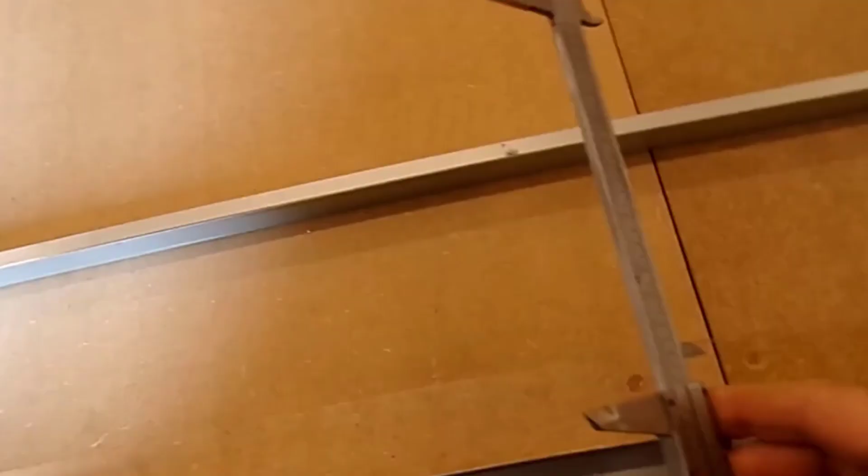The tapered bit of course doesn't need the jig, and it's 5 3/4 inches wide all the way along from one end to the other, as checked by a vernier gauge, and by precision straight edge it's straight. So there we go, that's ready for me to start assembling the spar.

On this side here, you might be able to just pick up, I'm not sure, looks a bit better with the shade there. There's tape going across there, and there's tape on this face here, and what I'll do is I'll lay the plywood in, bond the cap strip to one side. Once that's cured I can turn the whole thing over and then bond the cap strip to the other.

This tape is blade tape from my time working on Wessex. So we've got rotor tape and tail rotor tape being used. It's a little bit past its sell-by date for aircraft use, but it should be good as a sort of release to stop anything from bonding itself to the table.

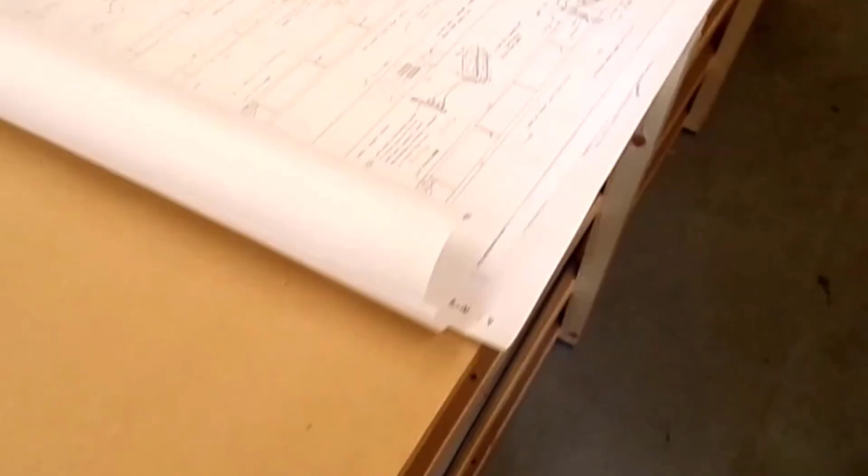What else have I been up to? Well, last video I was making the bell cranks. Here I've made up the blocks. These blocks are these little fellows that go in here, there, and there in close detail. As you'll note, I have taken the corners off, as it says here, optional. I didn't see much point in having the corners there.

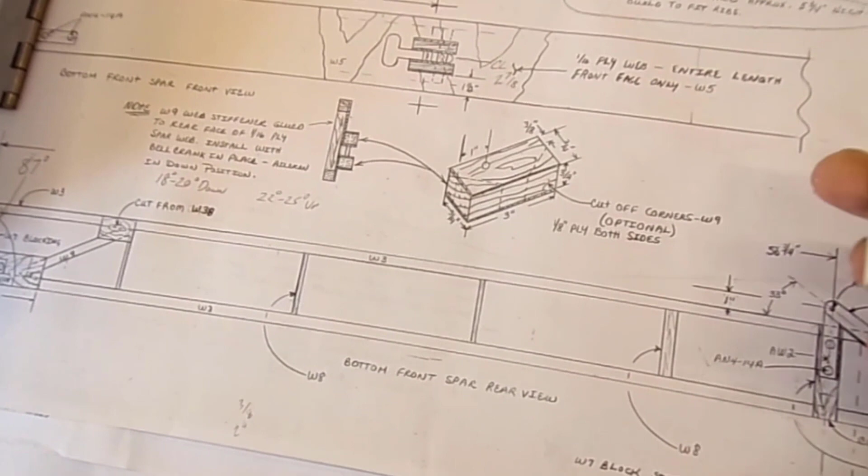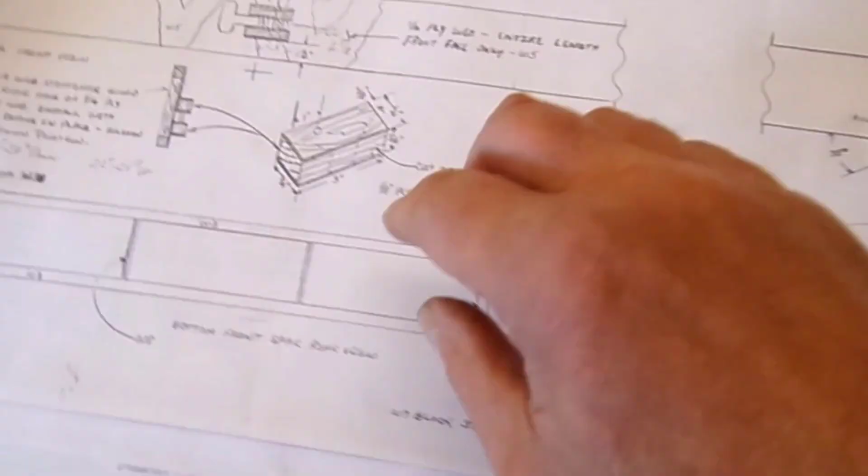Looking at the drawing, it looks like that hole should be offset to one side, but it says 3/8 of an inch to that position there, and it's only 3/4 of an inch wide, so it's right bang in the middle. As probably shown on one of the other views, if I recall, that view there, you can see that it's straight through.

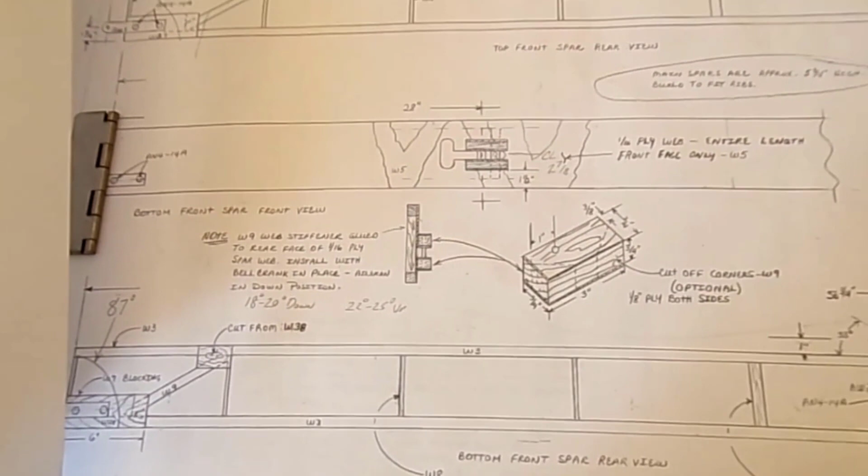And the pin or tube which is used for the bell crank is held in place by a piece of plywood top and bottom. I'll actually utilise that system. There's no way of actually removing the pin out the top. You can sort of see it here, it shows it in the central position here.

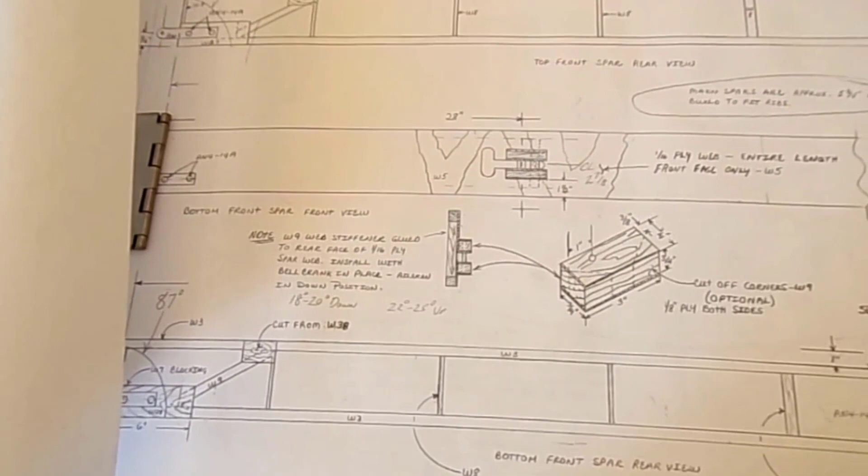The drawing, it sort of looks like it's offset below. There's not enough room for the pin to come out the top to change the bell crank during a service. So should that ever need to happen, it'll be a case of take off the plywood piece that's holding the pin in and slide the pin out to take it out, so it'll all be done from below. You couldn't get to the top to undo any sort of fastening there, so it seems like a good system.

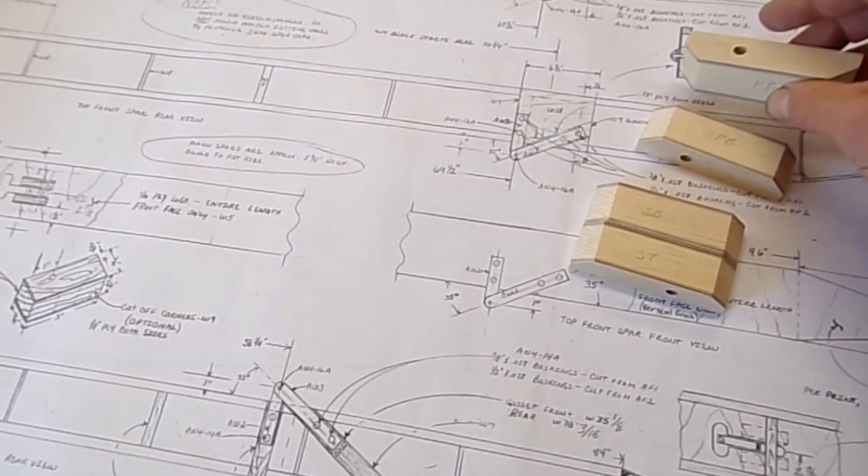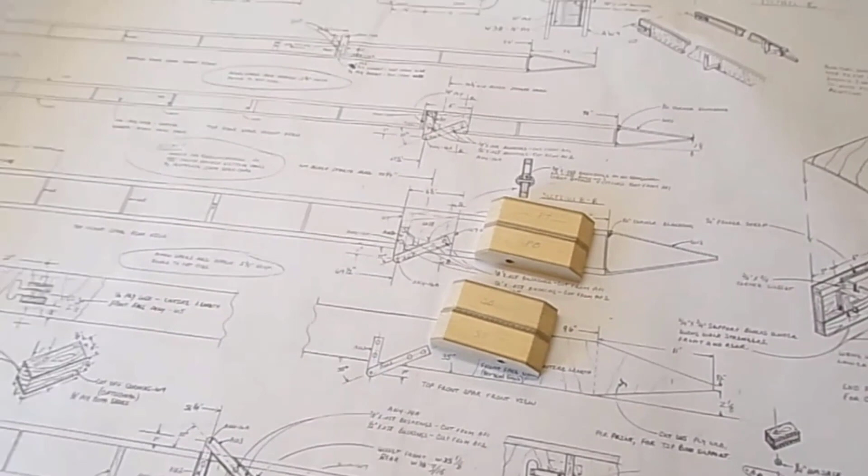You sort of see I've marked up they're in pairs, so a starboard pair and a port pair. They were match drilled. Nothing really spectacular, it's just 3/4 inch wood with 1/8 inch aircraft grade ply top and bottom, bonded on with T88 and then drilled through, and the inside of the hole there has been soaked with CA, super glue, for those who don't understand cyanoacrylate. It's been soaked into there just to harden it, and then it was reamed 1/4 inch, so it's a precise size hole. Hopefully that's good.

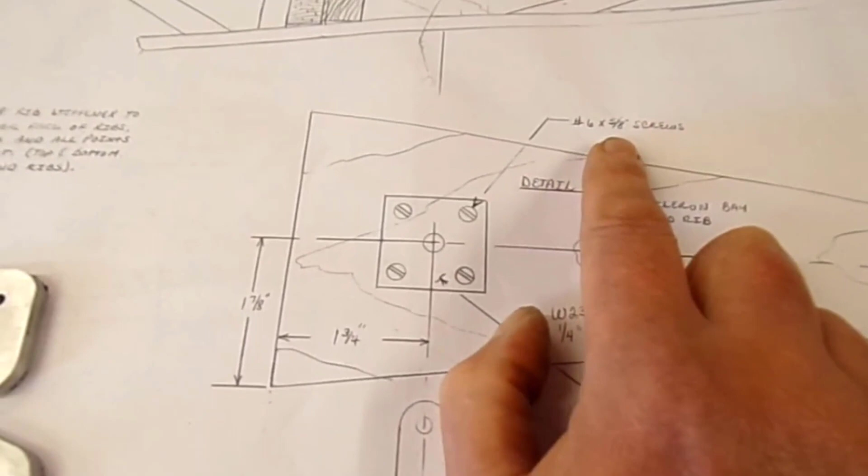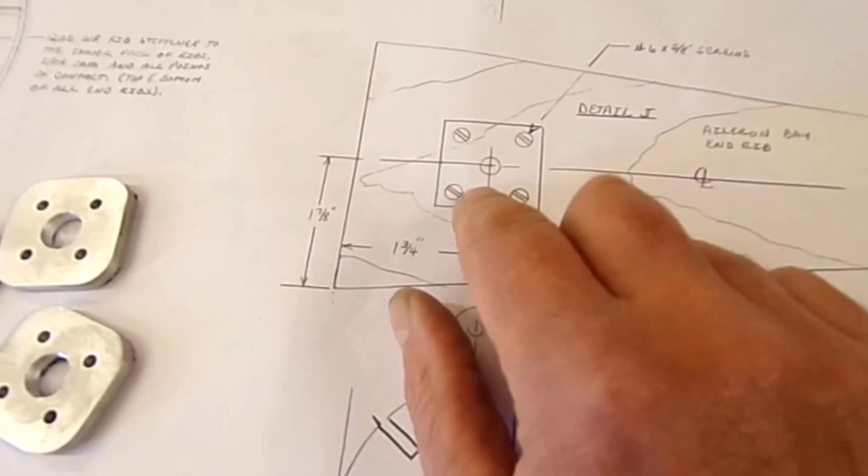Now for another one of my changes in life. The pivot for the aileron is here, and it's held on by number 6 5/8 screws, so it's just wood screwed into the ply. And from looking at the plan, this is on the exposed side of the plywood, so you can see it, so you could undo it, I suppose, and replace the bearing. That bearing there all just says bearing material, but elsewhere I found it to be Lexan.

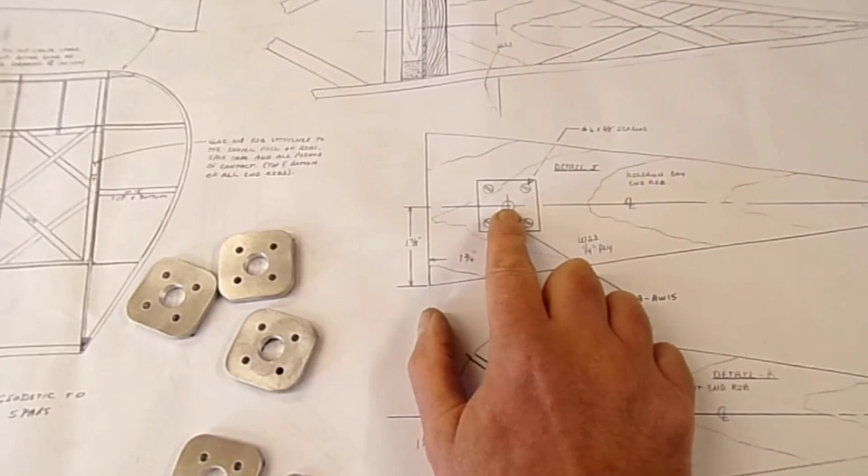I'm not keen on straightforward plastic bearings like that. I found in the past that they distort, they can wear, and the worst bit is I've found them become brittle and crack up, and I've found that on a couple of aircraft in the past where they've used it. So typical of me, I'm making changes.

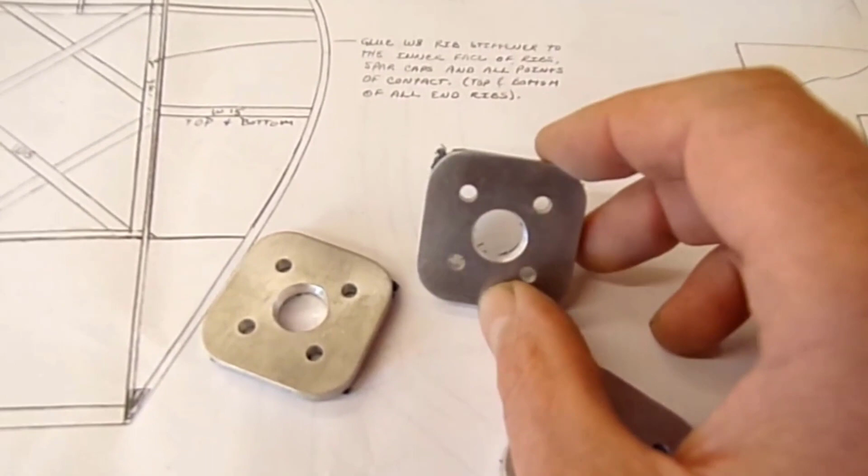So I've made up these aluminium plates. They're yet to be countersunk. They've got 4mm holes in. They're going to be countersunk for aircraft grade 4mm countersunk bolts. And rather than just being a screw going into the wood, it's going to go right the way through the plywood. And on the other side will be an anchor nut. So you'll be able to undo these to remove them. And then you can sort of see a massive great hole, that's more than a quarter, and that's to take these bearings here.

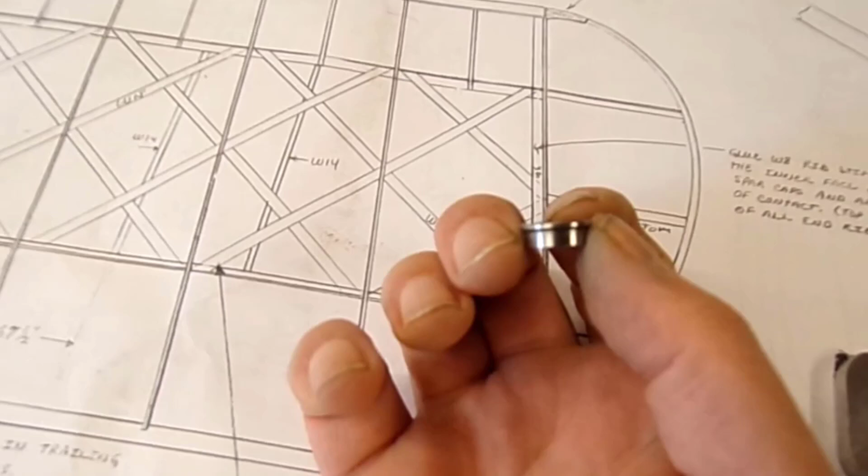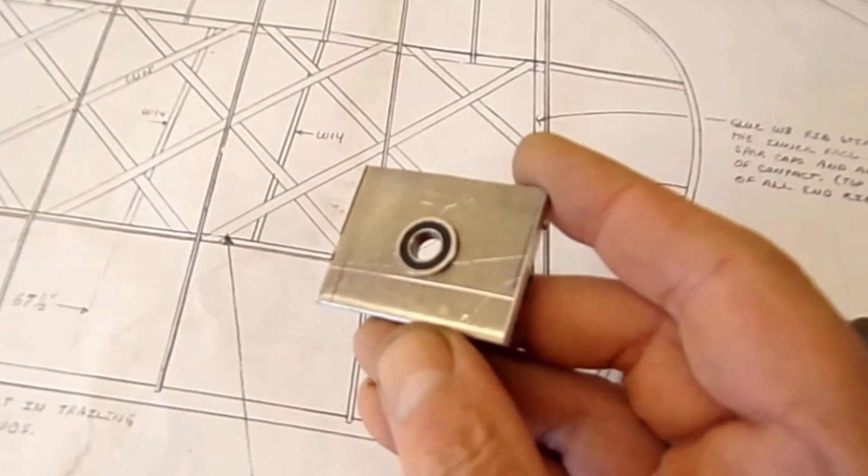These are sealed ball bearings with a shoulder on them. Hopefully that's showing up okay on the video. So they can't be pushed through, and the holes in the centre of the plates have been reamed to be an interference fit. So these will be pressed in. I've already had a go with a sample. There's my sample, and 250 kilograms of force to press it in, 125 kilograms of force to take it out.

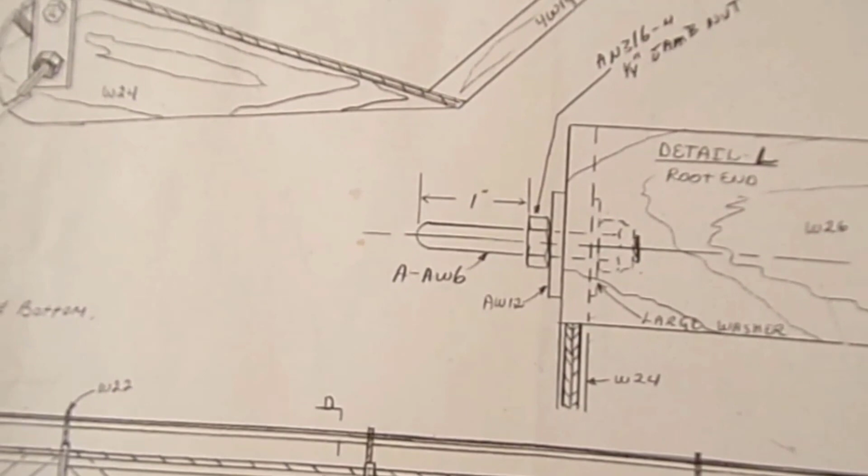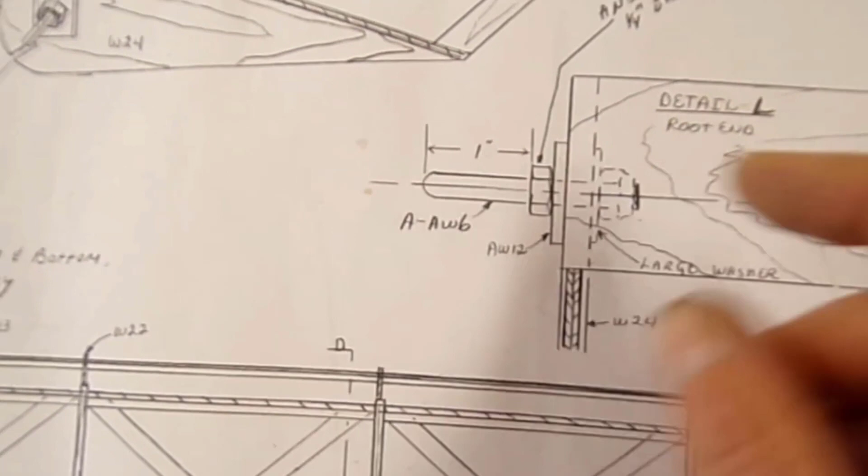But even should that become loose in there, it can't escape because of the way the system's set up. So all the pivot pins go from the outboard end of the wing inboard, so the force is being forced that way. The bearing will be forced into the plate with a little spacer between this nut here and the end face of the bearing, so there will be a small collar going onto there, so the race can't escape. And should the bearing break up for any reason internally, it still shouldn't be able to escape.

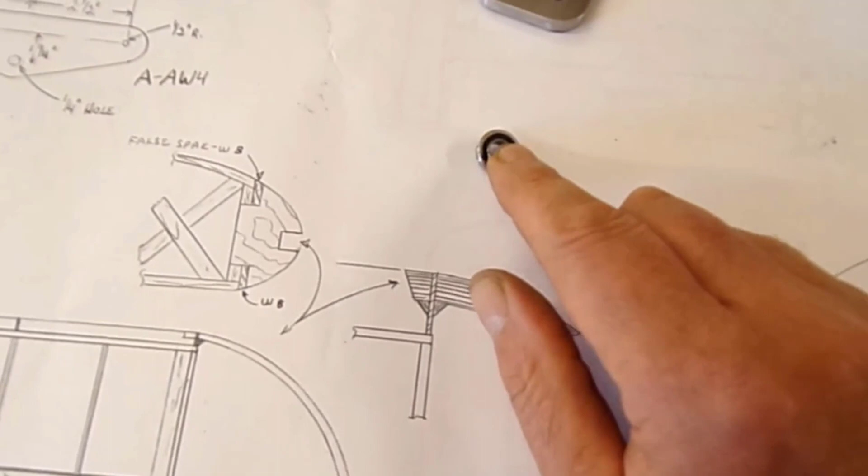Now the specification on these bearings is they can take 300 kilograms of radial force and 150 kilograms of axial force at 3000 RPM before they break up. Well, we're not going to be moving ailerons that fast, and the forces involved are going to be nowhere near that high.

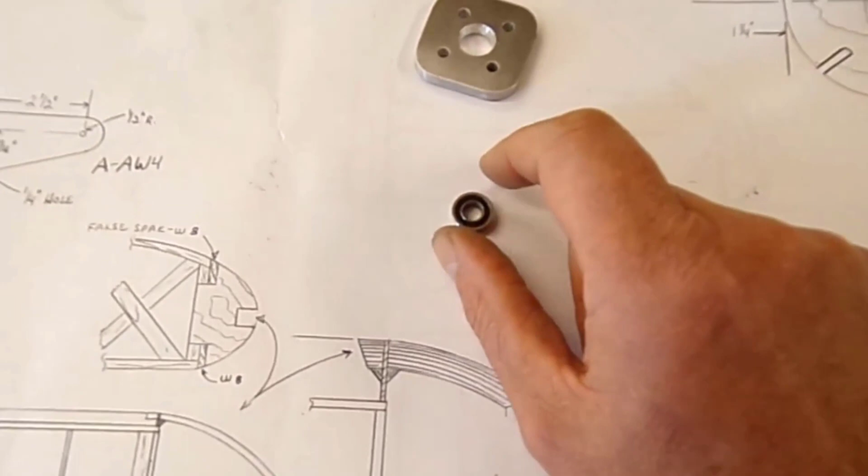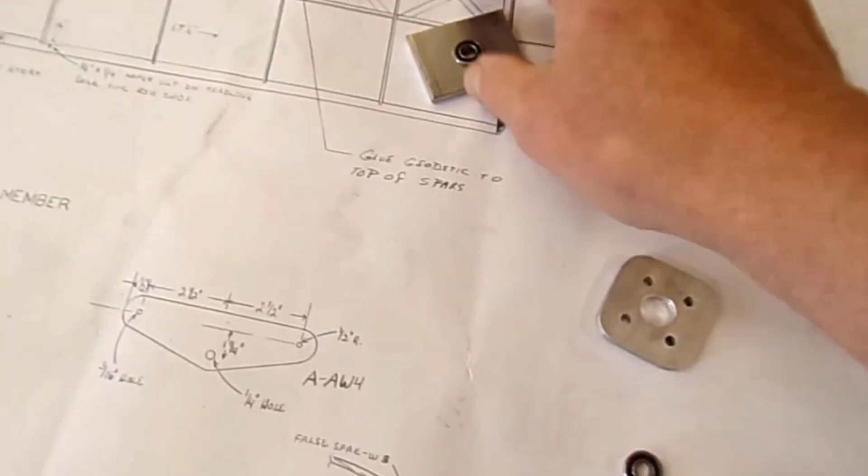My calculations on a number 6 screw in plywood would state that it would only be able to cope with 150 kilos of side force anyway. So these bearings will do far more than that. The bolts in there will be able to do far more than that. So hopefully it shouldn't be a problem. And as I said, you can sort of see these are shouldered, so they can't escape no matter what happens there. So that's my modification for the ailerons.

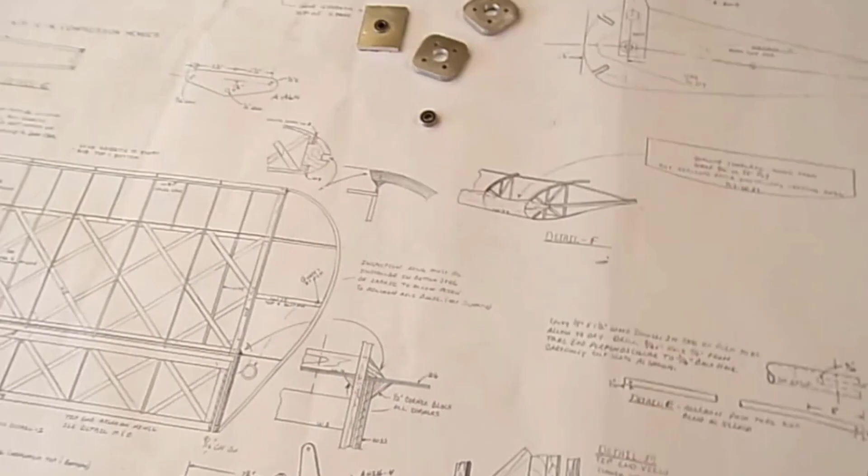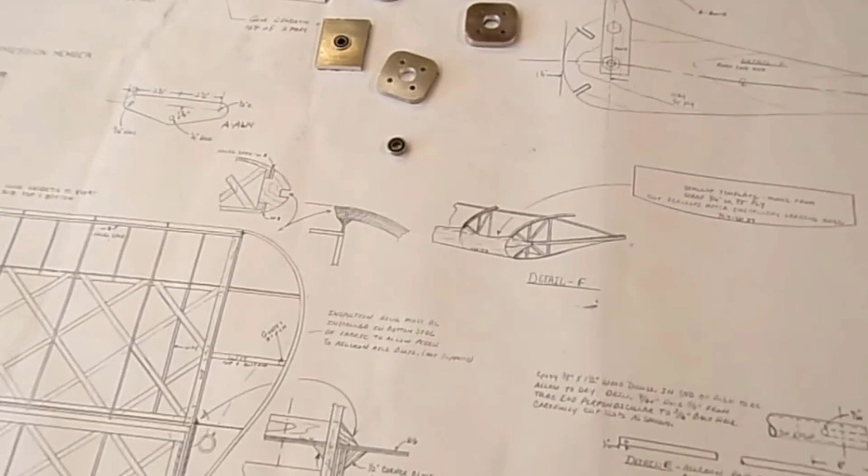Nothing wrong with this system. Nobody's had any faults or failures to my knowledge, looking at it. They're about 1.25 inches. I have gone out to 1.5 inches just to give the sufficient edge allowance and for the countersunk head screws. It's my personal thing. I'm not saying that anybody should do it this way. It's just the way, as you already see, I do some modifications.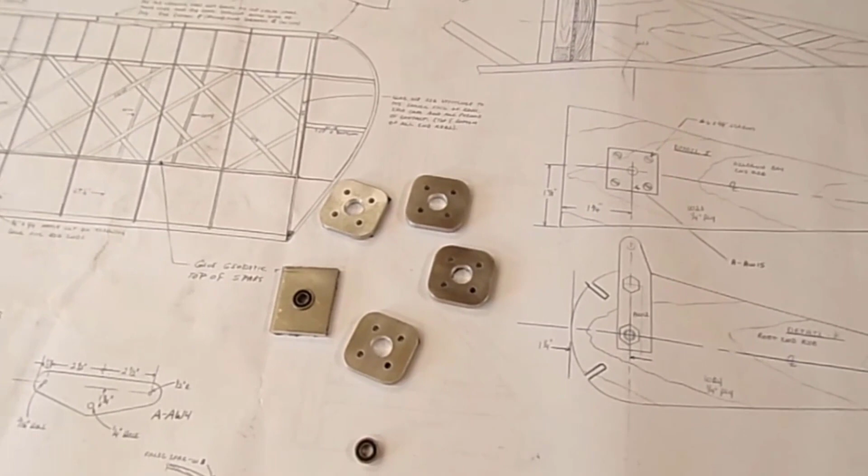The extra weight, yes, this is costing me some weight. It's costing me, including the weight of the screws, 3/4 of an ounce extra weight. So I don't think we can really complain about that. If I ate one less burger, I'd be saving even more weight. So I'm not complaining, although every little ounce or gram here and there does make a difference. Sometimes we need to look at things slightly differently and add a little bit of weight to make it just last a little bit longer.

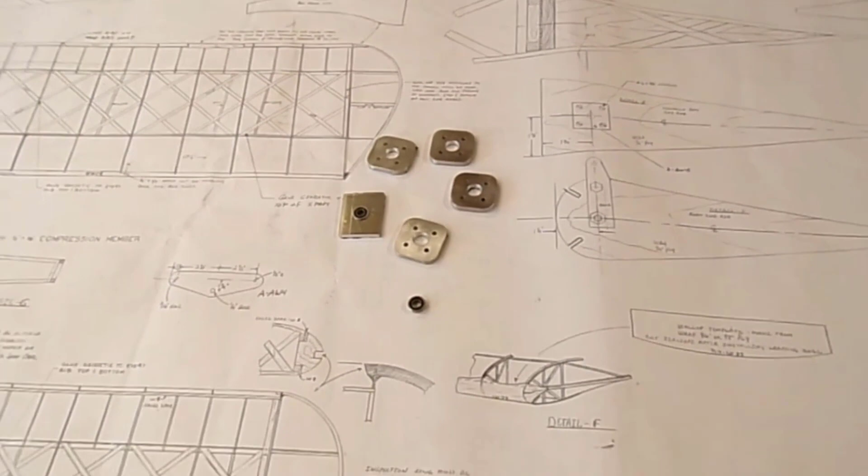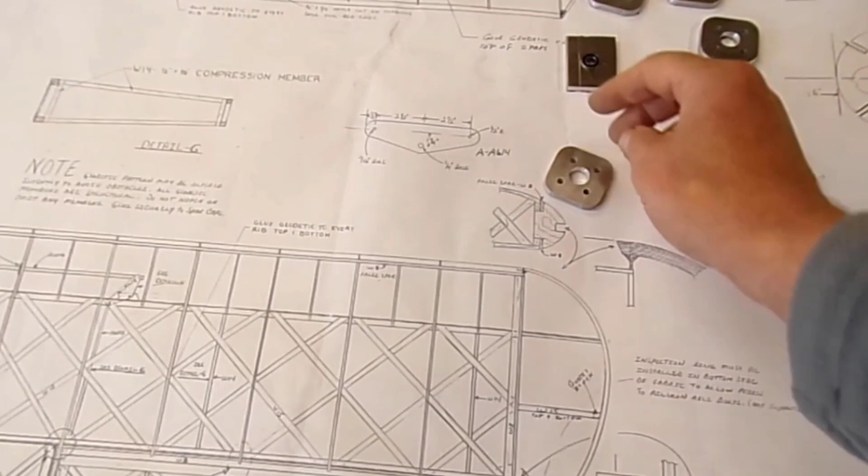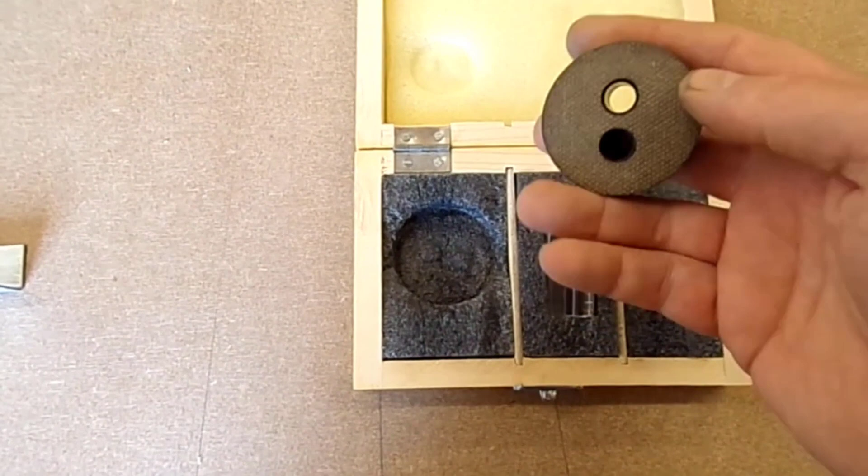And for marking out these points, I used a special tool which I've had for a long time. I'll show you that. But the actual fabrication of this was no different to the fabrication that I used for the aileron bell crank assembly work there. So this is my optical Spot-On optical center punch. I've had this for years and years. This bit is the bit you use. It's got a grippy section to hold onto whatever item it is so it doesn't slide.

And then we've got two different types of target point there. I don't know how well that will show up. You've got one there that's got a dot with a circle around it, and one there which has got crosshairs on it, which is my preferred version. You stick that down the hole, and the top here is domed slightly, so you end up with it being magnified. So that might show up in the camera. You can see the crosshairs at the bottom, which is nice.

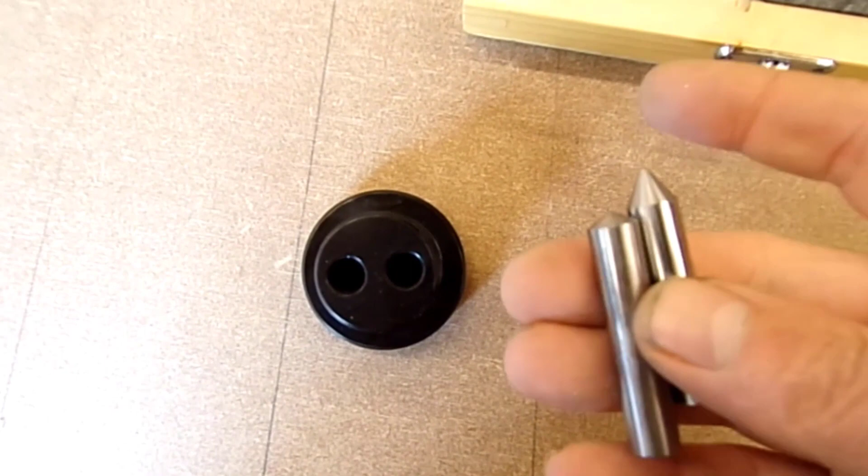Once you've got that in the position you want it to be, you can remove, without sliding the base, I'm doing this single-handed so it's not how I normally do it, but you can remove that, and then we've got two different center punches, one fairly blunt one and one fairly acute one. You could slide that straight down the hole, hit it with the hammer, and it gives you a center punch exactly where the crosshairs were before. Found it an extremely accurate method of center marking stuff. Used to use a similar item when I was in the Air Force. I think my father got me this one. It's probably about 20 years old or more now.

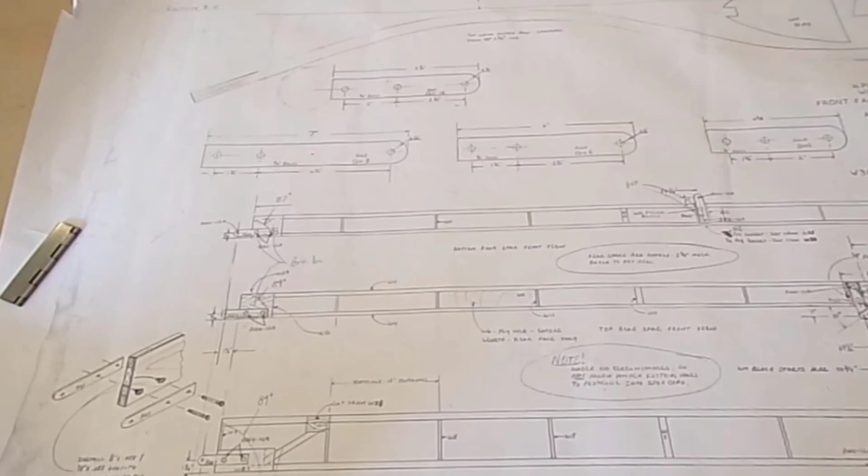So that is all I've done this week. Plans for next week, I'm going to make up hopefully some drilling jigs for these, just on a piece of plain steel, which I'll then heat up and harden. So hopefully I'll be able to show you what they look like, and if I manage to get round to it, I'll countersink the bearing blocks and get those painted, ready to be fitted at some stage when we have a wing built, and I'll put those into storage along with the bell cranks.